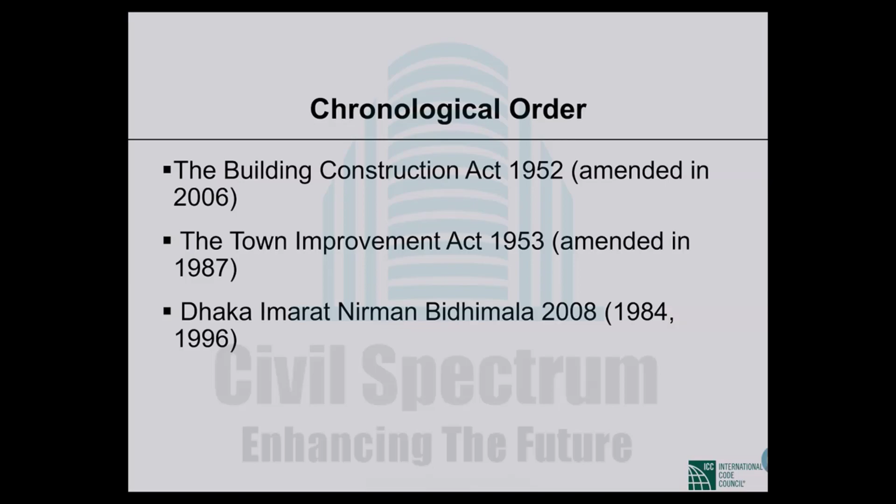And the last one, chronologically, Imarat Nirman Bidhimala, or Building Construction Rules, that was drafted and actually changed quite drastically quite a number of times: 1984, then 1996 was completely a new rule, a new set of rules, and in 2008 it was drastically changed. Presently we follow Dhaka Imarat Nirman Bidhimala that was drafted in 2008 and gazetted in 2008. So I'll follow this chronological order because it makes it easy for us to understand the context of one law, how it is related to the previous one.

So first we'll talk about the Building Construction Act 1952. The purpose of this act, as it is mentioned here, is an act to provide for the prevention of haphazard construction of buildings and excavation of tanks which are likely to interfere with the planning of certain areas in Bangladesh. So the main purpose was to prevent haphazard construction. I'm sure that you understand that this very purpose is quite relevant even today. All around us, we see haphazard construction.

So this act is very much relevant even today, and we can rather question how the act actually helped us to prevent the haphazard construction. So it's all up to you. We'll not go into that discussion, but that is the purpose. Second, what is the extent of this act? That is, where it is applicable. It is applicable over the whole of Bangladesh, in the entire country. This is important, because all acts are not applicable over the entire country, but this one is.

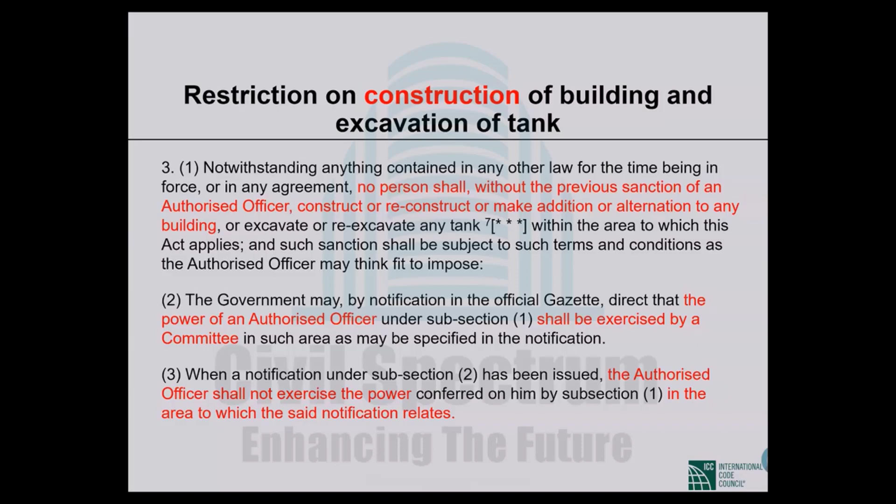So this is important to understand the role of the authorized officer versus the role of the committee. Now, as mentioned, there are restrictions on construction of buildings - you need a permit to construct. To use a building, you also need permission, so that you cannot use a building improperly. This is a restriction on improper use of lands and buildings, not just buildings.

So this is 3A. Subsection 3A1 says no owner or occupier, not only the owner or occupier of a building, shall, without obtaining previous permission from the authorized officer or the committee, as the case may be, use the building for a purpose other than that mentioned in the sanction.

So in the building permit, it will be mentioned what the use of this building should be. If you use it for any other purpose - for example, if the permit says residential, but you use it commercially - you cannot do that. You need to take permission for that. You need to have a permit.

3A2 says, when the authorized officer is satisfied that the existing use of any land or building does not conform to the scheme of land utilization indicated in the master plan, the authorized officer may, by an order in writing, direct the owner, occupier, or person in charge of the land or building to discontinue such use, and in the case of a building, also to remove or dismantle such building.

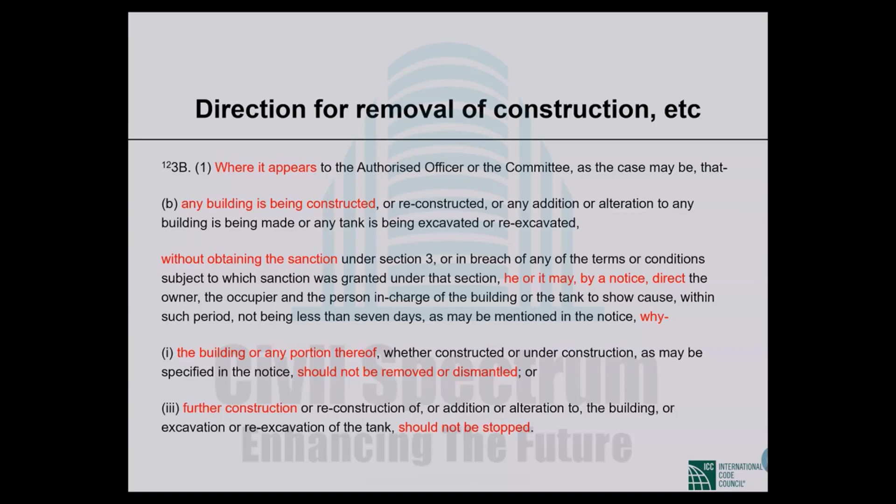So after the notice is served, then what should be the procedure? When a person is asked by a notice under subsection 1 to show cause why further construction, reconstruction, addition or alteration to any building, or excavation of any tank should not be stopped, he shall stop such further construction, reconstruction, addition, alteration or excavation, as the case may be, from the date the notice is served on him till an order is made under subsection 3.

So as soon as the notice is served, the owner must stop construction of that building. The owner cannot continue construction unless he shows cause and the cause is satisfactory and the case is vacated. Unless that is done, with the serving of the notice, the construction work must stop.

And then, after considering the cause shown, if any, within the time mentioned in the notice, and giving the person showing the cause a reasonable opportunity of being heard, or where no cause is shown within such time, the authorized officer or the committee, as the case may be, after such inquiry as he or it deems fit, is satisfied that the building has been or is being constructed or reconstructed, or addition or alteration to the building has been or is being made, or the tank has been or is being excavated, without obtaining the sanction.

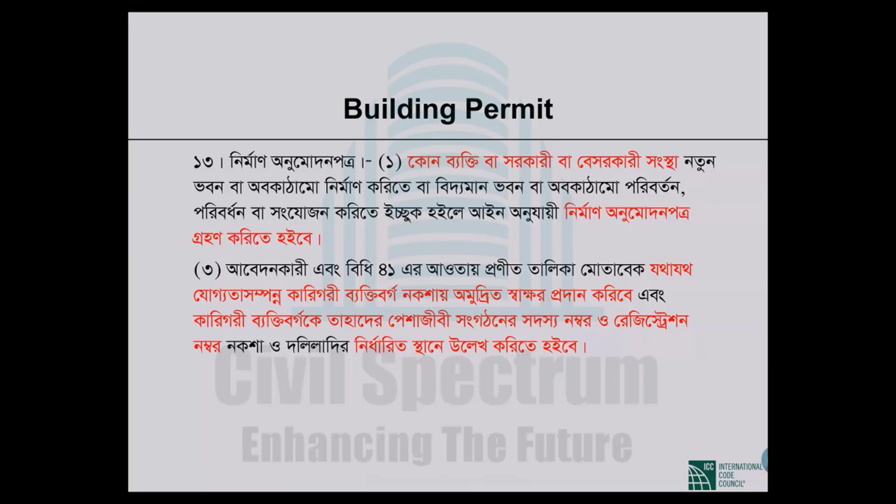That is again for specific cases like enlistment. It talks about enlistment -- there is a provision for a registration number. You have to have that too. We'll see.

Duties and responsibilities of the applicant -- so whoever applies for the building permit, what are the duties and responsibilities?

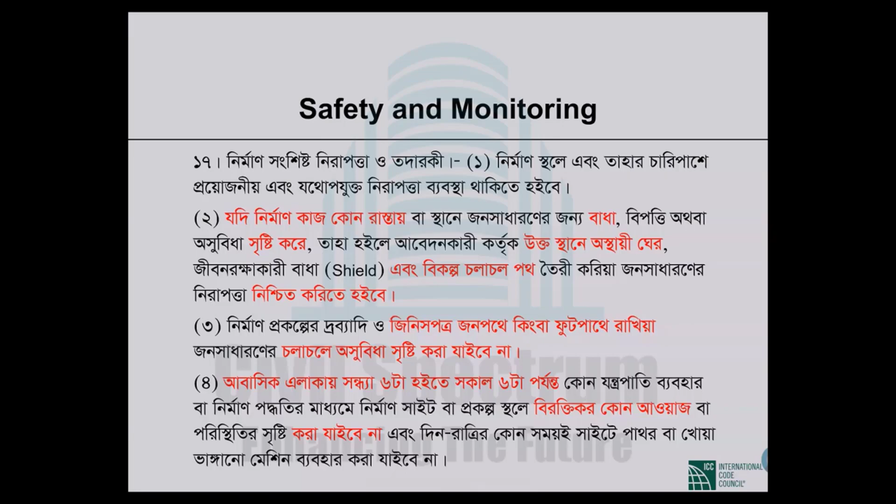It is not supposed to be in the Bidhimala according to the BC Act, but it is there, repeating some of the clauses from the code. I'm just pointing out the anomalies between the Bidhimala and the Act. You just have to be aware of that, but we cannot do anything about it. There is an ongoing process of updating this Bidhimala, and I hope the people involved in updating it will look into this.

Occupancy certificate, this is important. বসবাস বা ব্যবহার সনদপত্র, occupancy certificate. এক, ইমারত আংশিক বা সম্পূর্ণ নির্মাণ সম্পন্ন হইবার পর ইহার ব্যবহার বা বসবাসের জন্য বসবাস বা ব্যবহার সনদপত্র গ্রহণ করিতে হইবে। In the act it says that if you use a building improperly, violating the provision of the building permit or the master plan, then that is a punishable offense.

And the use, when you can use it, that will be here. By when you can avail the occupancy certificate, only then can you start using a building partially or completely.

দুই, বসবাস বা ব্যবহার সনদপত্র গ্রহণের জন্য আবেদনপত্রের সহিত নিম্নলিখিত দলিল ও নকশাদি কর্তৃপক্ষের সংরক্ষণের জন্য দাখিল করিতে হইবে, যথা: completion report, সমাপ্তি প্রতিবেদন, so that your construction has been completed, there have been inspections, and you have a completion report stating the construction has been completed satisfactorily, following all the rules.

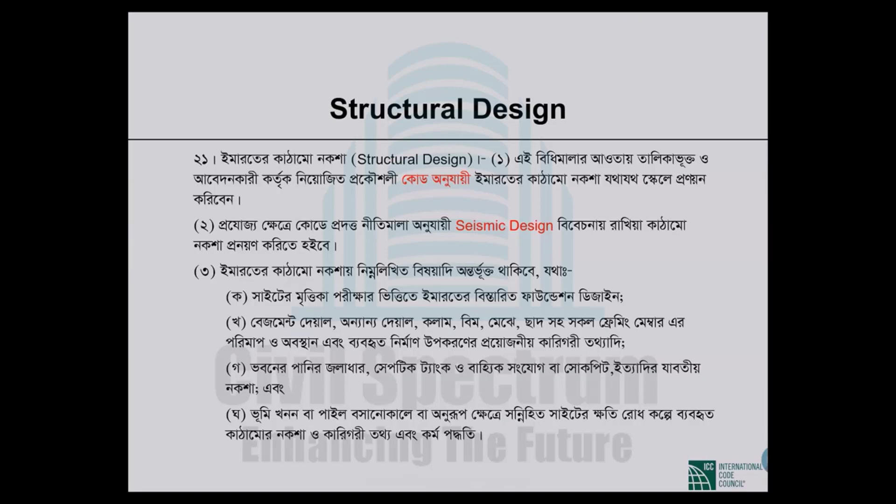Imarat Sheba, building services. Sorry, I'm wrong - there it mentions excavation, pile installation, connection site damage etc., related to foundation, but septic tank is also mentioned there.

But under services again, water supply, sewage disposal, drainage, gas - these will be there. Electrical substation designs must be there. Air conditioning too.

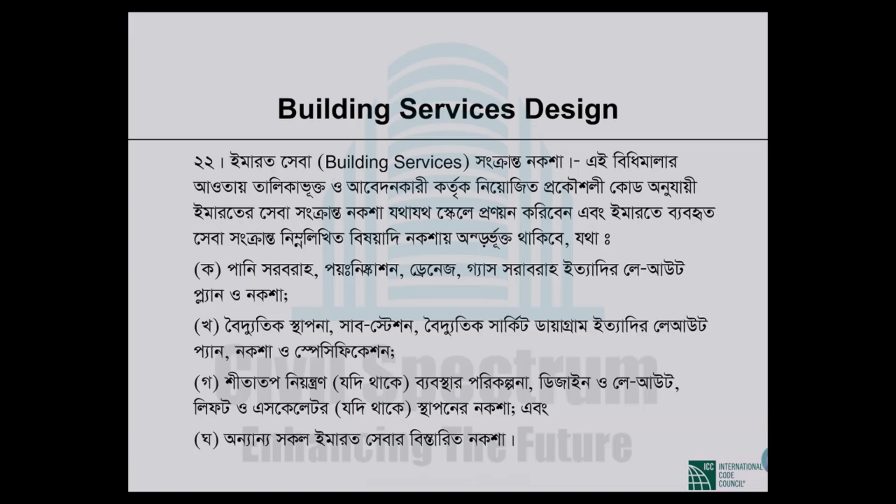So all the building services designs, you have to submit for occupancy certificate. And the occupancy certificate's validity is not eternal.

You have to renew the occupancy certificate every 5 years. Whenever you apply for occupancy certificate renewal, there is supposed to be an inspection. So after every 5 years, there is supposed to be some inspection.

And there is a provision for when you need a lift or elevator. There is also a validity for building permit - 3 years. What does this mean? It means if you apply for a building permit and obtain it, but within 3 years you don't construct anything.

If you leave the plot vacant without construction, then you have to apply again for the building permit. So this is important - committees.

I have many more things to cover. Sorry, I'll go a little bit faster now. So, committees.

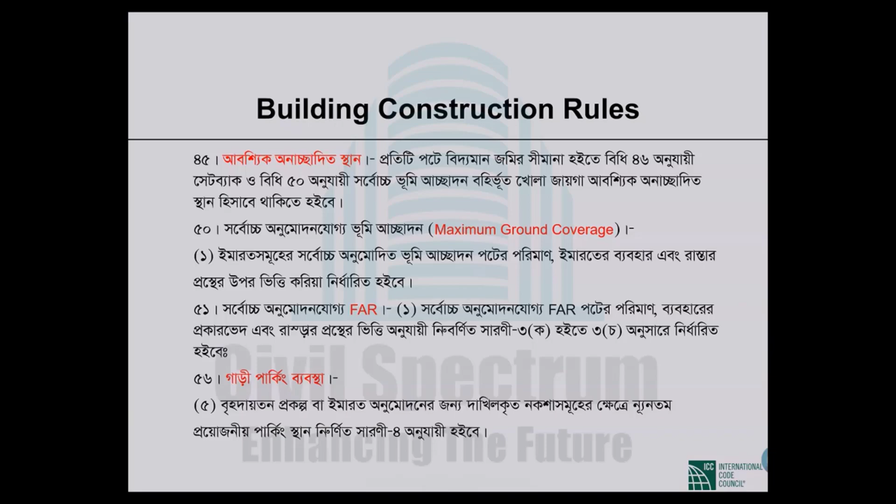So I talked about mandatory uncovered area that is mentioned here. It talks about maximum ground coverage, floor area ratio, and parking facilities. But these are all mentioned even in the building code. So these are either repetitions or duplications, and in some cases there are contradictions. First of all, these are not supposed to be in the Vidhimala according to the BC Act.

Interestingly, what is written here about priority, বিধিমালার প্রাধান্য: এই বিধিমালা ও কোডের মধ্যে কোনো প্রকার বিরোধ বা অসঙ্গতির ক্ষেত্রে এই বিধিমালা প্রাধান্য পাইবে, তবে যে সকল বিষয়ে বিধিমালায় সুস্পষ্ট উল্লেখ নাই সেই সকল ক্ষেত্রে কোডের বিধানাবলী প্রযোজ্য হইবে। So this is interesting — if there is any conflict between the code and the Vidhimala, the Vidhimala will prevail.

Whereas there shouldn't be any duplication, because the scope is clearly defined in the BC Act and the scope is completely different. But while preparing this Vidhimala, it is prepared in such a way that there are overlaps with the code. And that's why you need this clause.

So in many cases in the Vidhimala and in the Act, it is mentioned that the government will come with some notifications for specific purposes. One of those purposes is the formation of BC Act committees. So in the notifications, government talks about, or government has formed 3 types of BC committees.

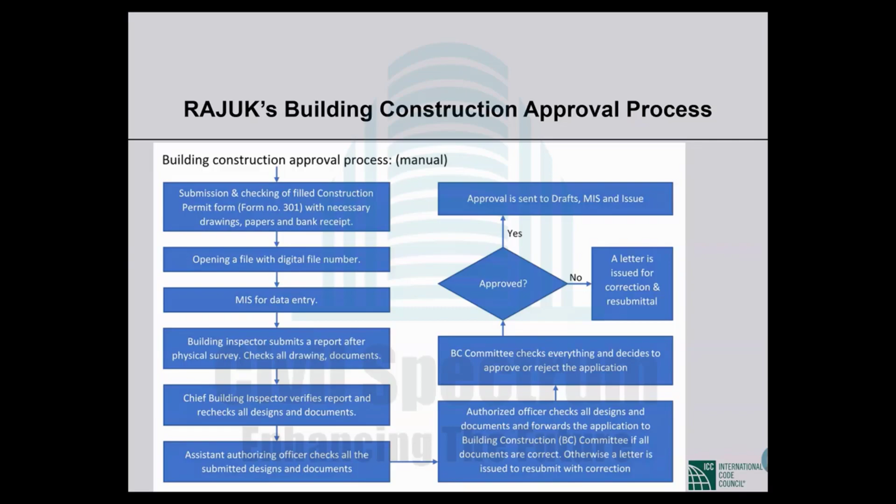This is important, for simplification of the plan permit system. For special projects or high-rise structures, you were supposed to take permission from different organizations previously, called NOC - No Objection Certificate - from 11 organizations. That has been simplified by gazette notification in March 2019.

So you can read it. I hope you have the printout of this presentation there. It is self-explanatory. So you don't need...

No NOC from say FSCD if it is not 10 stories or higher. You don't need NOC from the DOE if that is not applicable. For example, you don't need NOC from civil aviation if your structure doesn't fall into the air funnel, things like that. Previously, all applications used to go to 11 organizations. That has been simplified by this order.

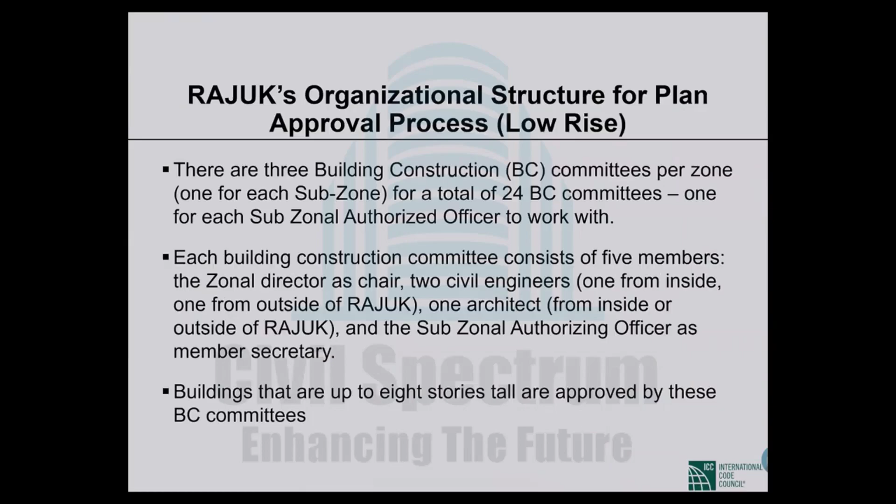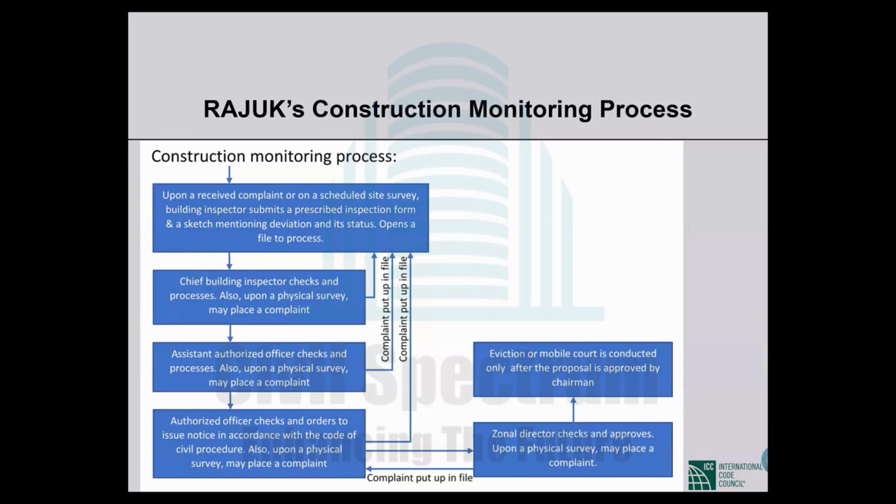This is kind of repetition, I'll skip these. For the construction monitoring process, that is like inspection - once you apply for building permit, once you start construction or up to plinth level, there are stages of inspection. How the inspection activities are carried out, the process is given here.

Now the fire safety inspection - this is important, I want to spend a few minutes on this. Where does fire safety inspection come from? The power and responsibility of fire safety inspection is given to the Fire Service and Civil Defense (FSCD) by a gazette notification - if a structure is more than 10 stories or 33 meters, then FSCD will inspect for fire safety.

This is not given by the BC Act. This responsibility is not given by the code. Rather, the building code says that the authority, that is the building official, is the person responsible - the authorized officer - who will make sure that proper fire safety is there, that whatever is written in the building code regarding fire safety provisions is followed in a specific building. It is the responsibility of the building official or the authorized officer.

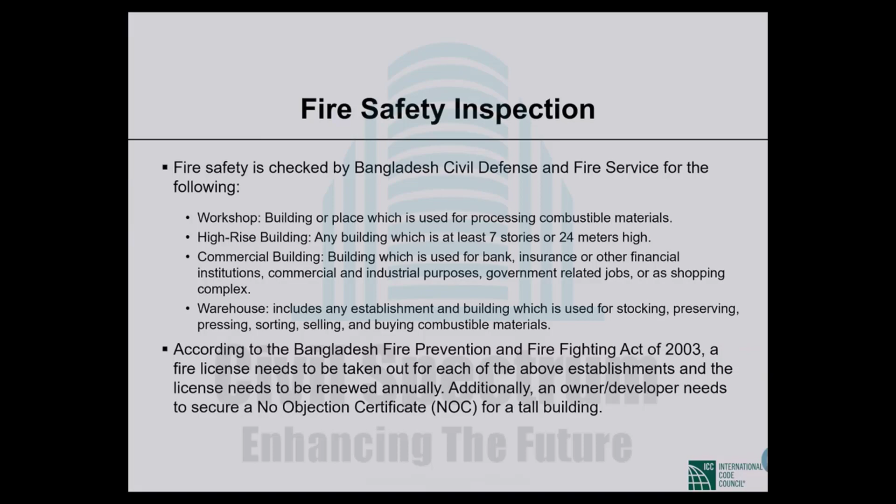That belongs to the authorized officer or building official. So whenever you apply for a building permit, in the plan approval process and the inspection process, the building official or authorized officer will ensure that fire safety provisions are there in the design, during inspection, and in construction. So it is the mandate of the building official, not FSCD. FSCD's mandate is to ensure that you are following the Fire Safety Act, which is a different act, not the Building Construction Act. There is a misunderstanding about all this, so you just have to be aware of it.

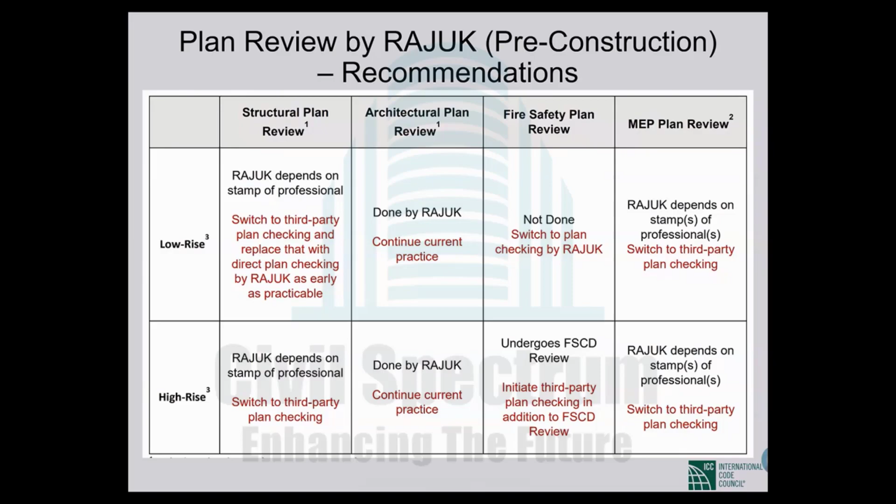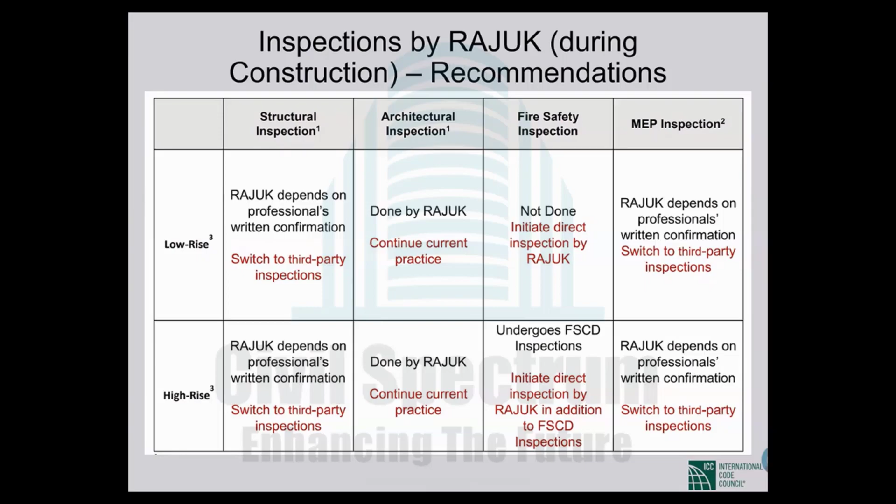That's why in this project ICC is recommending these changes, how the plan review process should be conducted. All structural plan, architectural plan, fire safety plan, and building services plan should be reviewed, and recommendations are there for how they can be reviewed. Even for inspection, there are recommendations on who will inspect, how they will inspect, and what should be the qualifications. These are recommended in this project by the ICC in detail. I just mentioned that, along with recommendations regarding issues, but I'm not going into these. So I finish my presentation here. Thank you for your patience.